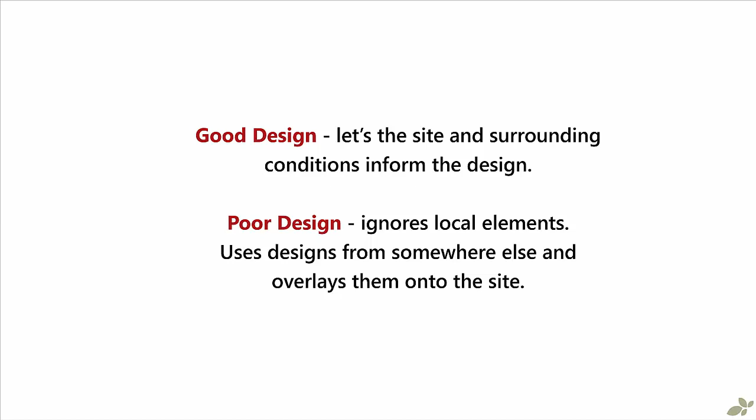I believe good design lets the site and surrounding conditions inform the shape and use of a space. Poor design ignores local elements. It is usually a previous design taken from somewhere else and overlaid on the site. Using your local conditions effectively can really add an extra layer to your design. Let's look at a quick example.

The Shrine of Remembrance in Melbourne, Australia has a garden courtyard, one of 4 small courtyards built about 15 years ago. The material palette is nice and simple: trees, plants, timber and stone. You can see a darker paving on the left of the courtyard and a lighter paving running through the middle. In between these runs a thin strip of marble.

This line matches the shadow cast by the wall on a specific date, Remembrance Day, the 11th of November, every year. A simple gesture, it does however show a simple way site analysis, in this case the shadows cast due to sunlight, can influence the design.

For many small projects, site analysis is often overlooked, or if it is considered, it is only to cover the basics. Most experts, designers and builders, live and work in the area they are designing for. This means they have experience with the local conditions. They adjust their designs and construction accordingly. You don't necessarily have that level of knowledge. What you do have is a more in-depth, specific understanding of your site.

Let's look at the different data you need to collect. I break things down into 2 categories: macro and micro conditions. Macro refers to local weather conditions and the climate of your town, city or region. Micro refers to specific physical conditions of your site, both within your property boundaries and the surrounding properties.

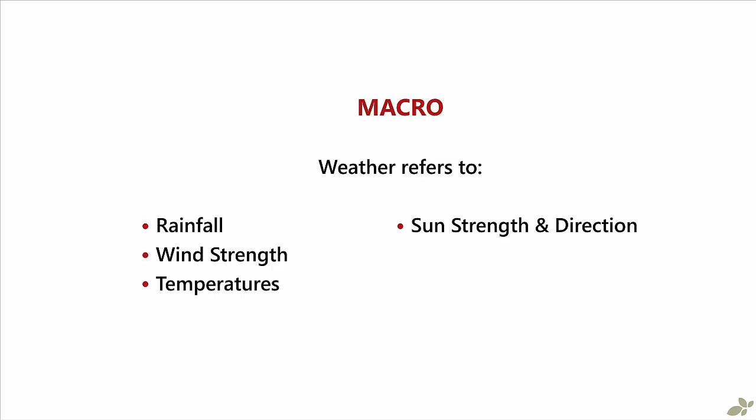One thing to point out: much of this data may not make much sense to you at first. It can be very helpful when talking to experts, especially horticulturalists later on. Let's look at some of the macro conditions. Weather refers to some of the following: rainfall, wind strength and direction, temperatures, sun strength and direction, weather extremes, or snowfall if applicable.

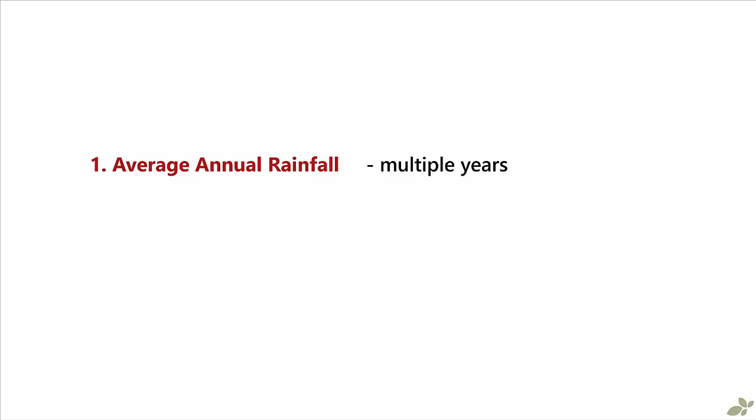2 things we want to find for each of these points. We want to find the yearly or annual averages, and the change across the seasons or the year. This means you really want to find data points for the following. If we look at rainfall, we need the average annual rainfall. You want to try and get an average based on multiple years instead of just the previous year. Consider if this is likely to increase or decrease in the future.

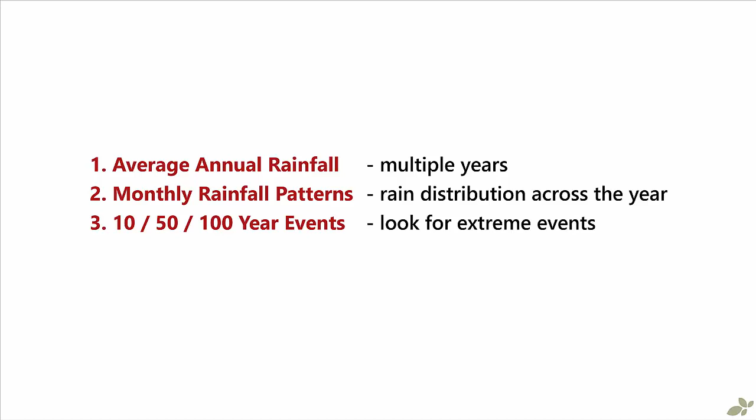Monthly rainfall patterns. How does the rain get distributed across the year? What seasons or months? Knowing this will help you design water collection, material selection, and activity or feature placement. You also want to know 10, 50, or 100-year rainfall events. You want to try and find the extreme events. What is the heaviest rain, snow or wind etc. that you've had in the last few decades?

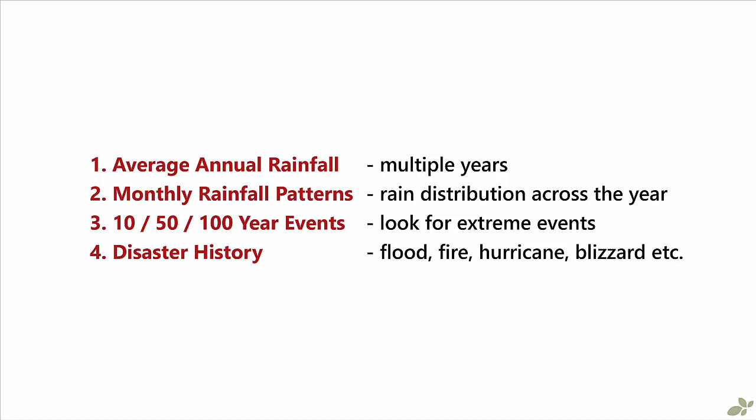Similarly, disaster history. What events have happened? Fire, flood, tornado, hurricanes, blizzard, droughts or extreme storms? Understanding this will inform your choices of materials and where you place certain items. You don't want to place large walls or trees near the house if they're likely to cause damage in your yearly hurricane season.

You can do a similar list for wind strength and direction and any other local climate or weather conditions. Particularly with extreme events and disasters, you want to over-engineer your design. You want to provide a margin of safety on your infrastructure so your time, money and work is not destroyed in the next big storm.

With sun strength, you don't need data per se. I want you to consider the basic things. Is the sun too hot in summer? Would I like to get more into the house in winter? Along with the strength of the sun, you want to know its position at different times of the year. You can use certain materials, like deciduous trees for example, to provide shade in summer and allow sunlight in winter.

Knowing where the sun will come from allows you to plant trees in better positions to facilitate this. Now you're probably thinking, what the hell do I do with all this information? As I said, much of it won't make sense or is difficult to visualize. You can take it to experts who may or may not use it. We can also use a little trick and some practice to better imagine the effects of these conditions on your site, but we'll look at this a little later.

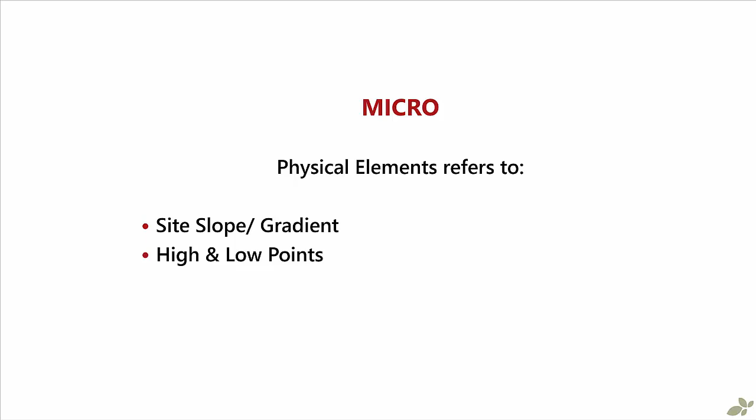The second set of conditions I outline refers to the micro, the physical elements of and around your site. These are the site slope or gradient, and how much and how steeply your site slopes, the high and low points of the site, which inform where water will flow to and collect, the soil conditions, pH and consistency, is it loam, clay or sand, at different points of your site. This will be very helpful for plant experts, especially when combined with sun and shade information.

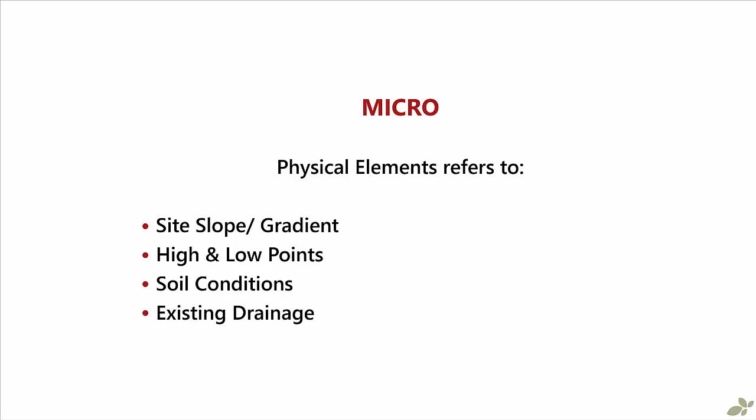You also want to know existing drainage and irrigation patterns. Do you have existing infrastructure in place? This could be useful information for a builder. Definitely need to know existing utility services or easements. This is extremely important information. These refer to areas you generally cannot build permanent structures. Councils may require access to these areas in the future, so if you build over them, you may be required to tear them up. These spaces are best left as garden beds or access paths, something able to be rebuilt easily and cheaply if needed.

You also want to know neighbouring elements, buildings, trees, etc. These may result in someone overlooking your area, something you may want to prevent in your design. Another one is shadow diagrams. Where do shadows fall on the site? From both elements on your site and neighbouring sites. Knowing this information is crucial for getting good plant recommendations. It also helps when you position any activities or features you want to do at particular times of the year.

Lastly, you can also look at native plants and animals. This isn't 100% necessary, but it can add an extra layer to your design. Providing habitats for native animals can be rewarding, especially if you enjoy watching and listening to them. Similarly with plants, you'll find species that you know are capable of growing in your environment.

A few things on the points above. Things like soil pH may require testing. You can find simple kits from a Home Depot or hardware store. You may also like to get more informative soil reports. These are more expensive, but required for engineering of retaining walls or patios, pretty much anything that requires footings or excavations. At this point in time, I'd recommend going basic until you've started doing some of your design work.

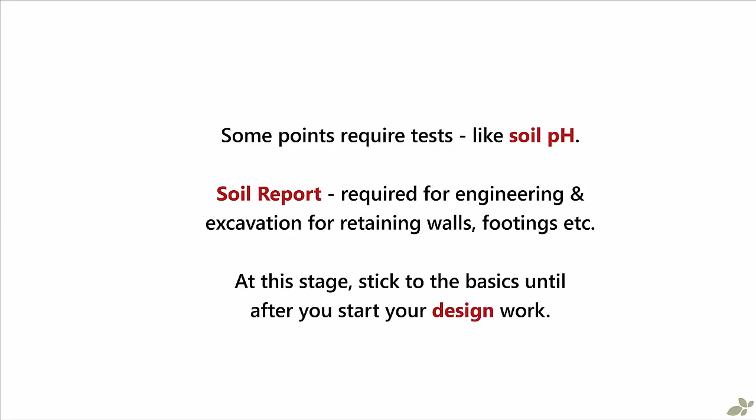Alright, you've got a list of things you need to find out. It's up to you how detailed you go in all of them. Personally, I like knowing rainfall, wind, sunlight, shadows, water flow, and native plants and animals. Council elements are also mandatory. Extreme events are helpful, but they can be hard to visualize. So let's look at an extreme event or extreme rainfall example and consider how it can impact our design thinking.

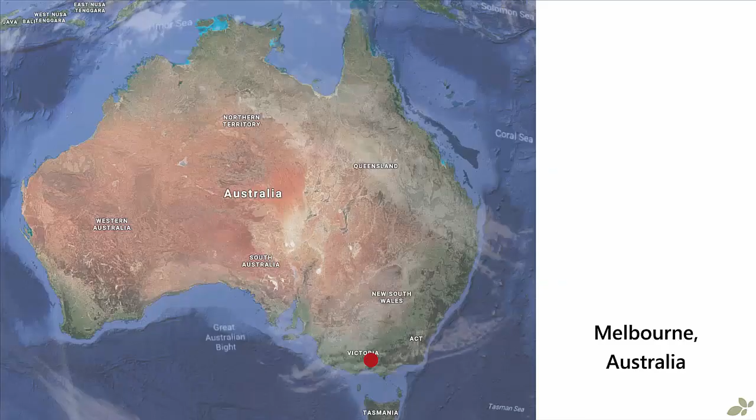I mentioned I'm from Melbourne, Australia. The Bureau of Meteorology provides info on something it calls intensity, frequency, duration, or IFD data. This data provides the following figure. The probability of 50 millimeters or 2 inches of rainfall in 1 hour is 1% each year. Kind of equates to a 1 in 100 year event, sort of. I'd encourage you to look at the link from BOM that I placed below. This page walks you through how things are calculated and what it means. It's very useful, even if it's a little challenging to understand.

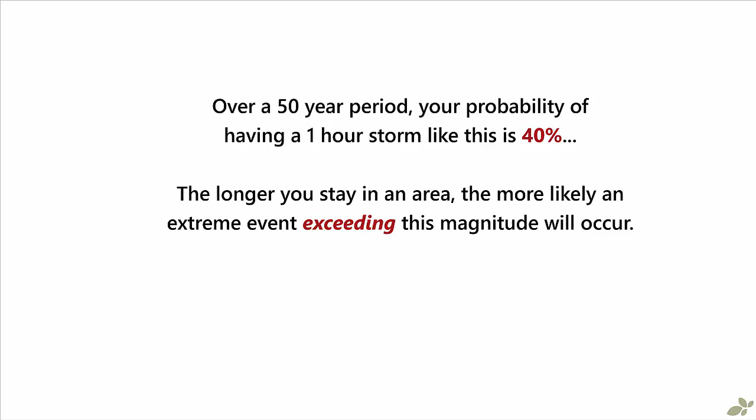In this case, it does not mean it will only occur once in 100 years. In fact, over a 50-year period, your probability of having a 1 hour storm like this is actually 40%. If probability is not your thing, don't worry. All you have to know is that the longer you are staying in one area, the more likely an extreme event exceeding this volume will occur. If I spend 50 years living in Melbourne, there is a 40% chance I'll experience 1 hour of 50 millimeters or more of rainfall. Okay, great.

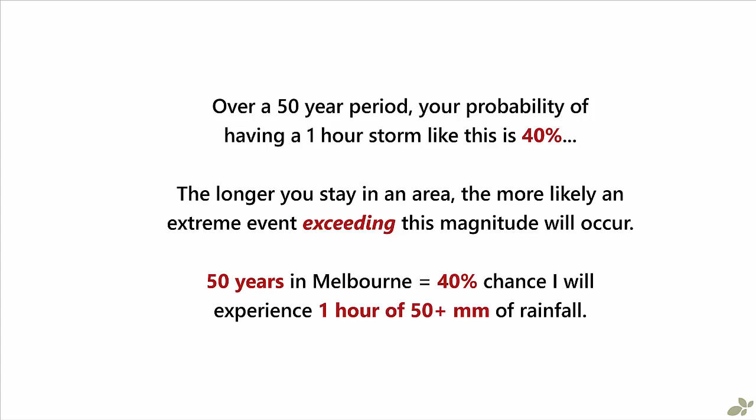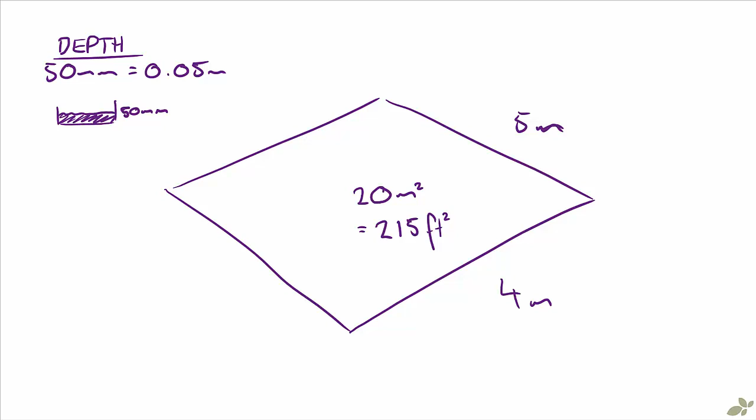So what does this look like? Let's say I have a site area of about 20 square meters, about 215 square feet. It's quite small. 50 millimeters equals 0.05 meters. This corresponds to the depth we'd see if we had 50 millimeters of rainfall in 1 hour. So a 20 square meter area times 0.05 meters of depth equals 1 cubic meter or 35 cubic feet of water.

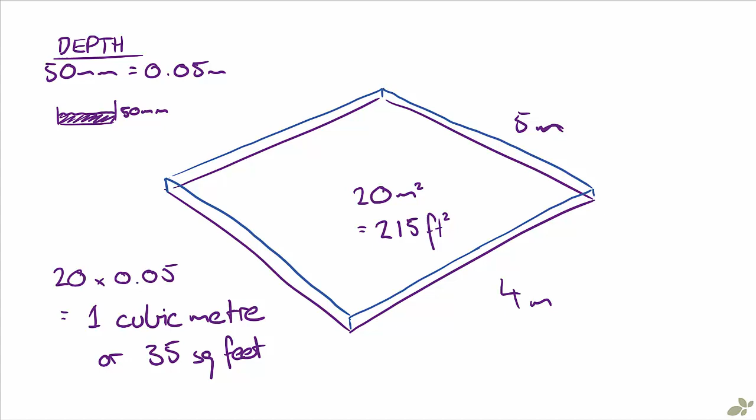This is actually a substantial amount of water. It's equal to 1,000 litres or 264 gallons. Given the average bathtub is anywhere from 25 to 50 gallons, this is equivalent to 6 to 10 bathtubs of water falling in an hour.

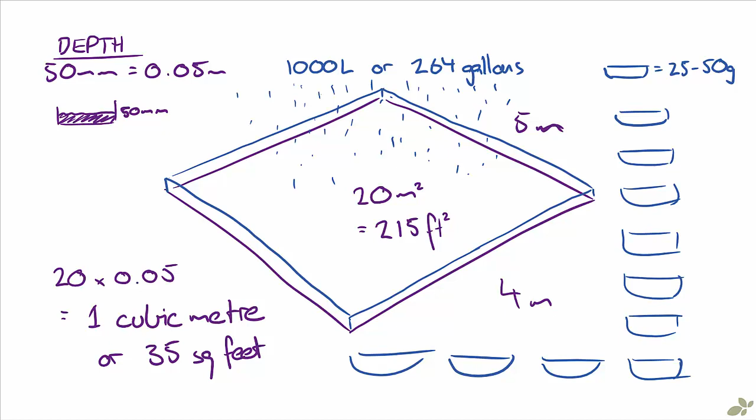Another thing about this thought experiment, this assumes the area it falls on is flat. If your site slopes, the low point will collect water, rapidly filling up. It also ignores materials. Different materials absorb water at different rates. The harder the surface, the more likely the rain will sheet off it and drain to another spot.

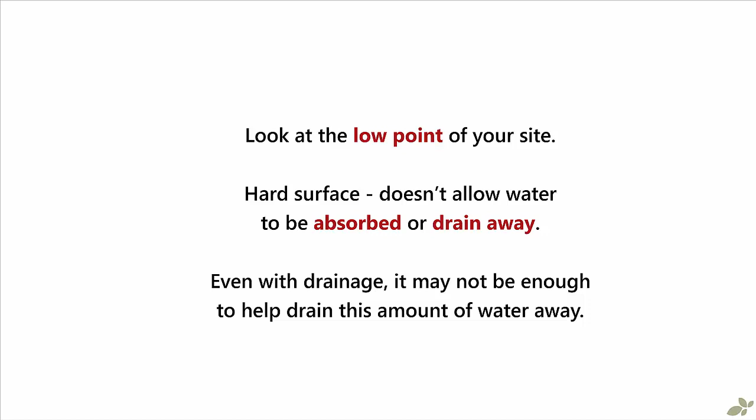So how does this info help? Well, look at the low point of your site. If you had a hard surface there, like an entertaining area, it would quickly fill up and overflow. Even with drainage, it may not be enough to allow the water to leave the space and enter stormwater. This is where over-engineering can help. Designing, or having someone else design, drainage to cope with something like this can be extremely helpful.

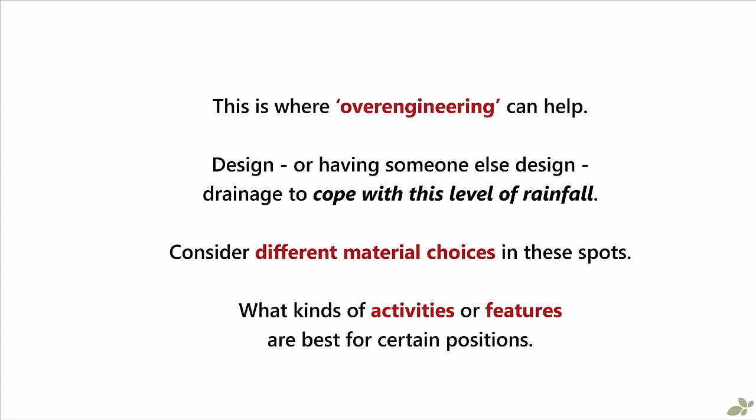You also learn to consider what material choices are suitable in different spots on your site, and what kinds of activities or features are best for certain positions. Okay, hopefully this gives you an idea of how this knowledge can influence your design thinking.

You've got the data, the next step is to visualize it. The best way is with simple pictures overlaid on your base plan. We'll look at putting your base plan together properly in step 4. For now, a simple outline of your site and house will do. Enough so you can interpret the data you present correctly.

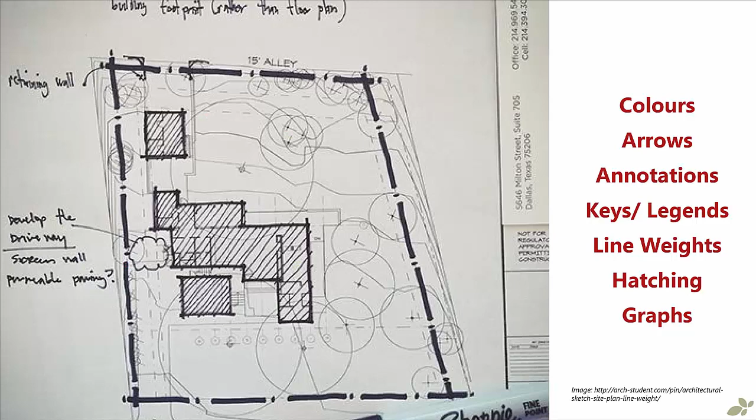You can use a few different visual representations, such as colours, arrows, annotations, keys or legends, line weights, hatching, and hatching thickness and hatching orientation are both helpful, and graphs. You want this information to be easily understood when you look at it.

You can break it up by month or season, or by category type like wind or rain, or you can do both. You should be able to tell someone the information you found at a glance: when you get the most rain, where it will drain and collect, what your extreme rain event will look like on your existing site. Same thing with wind and sun.

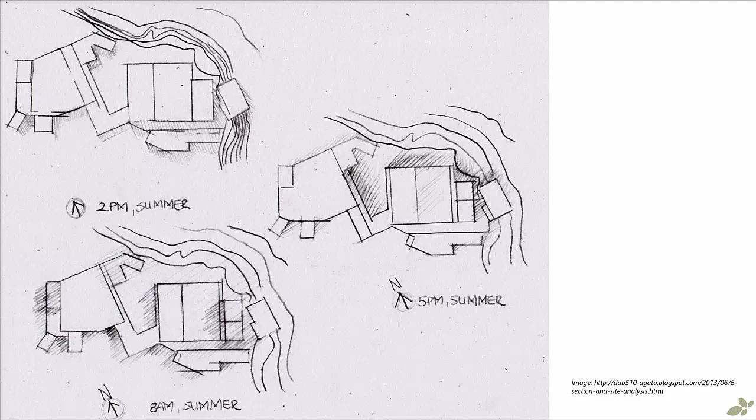Where do the shadows fall at different times of day? Think about what this means for certain activities you want to do, like entertaining. How does this knowledge change your thinking about where good locations in the backyard may be for these kinds of things? And don't forget council regulations. What spaces need to remain accessible for future maintenance, or future potential maintenance? Draw up some simple diagrams or plans outlining as much or as little information as you want.

One thing to mention here as well, as you go through the design process, you will add elements into the landscape. This means, of course, they will be impacted by and impact the surrounding conditions. They may cast shade, or redirect wind, or alter water flow, or create new microclimates.

Towards the end of the design process, it's worth revisiting your site analysis and trying to guess what your changes will do. Hopefully you can fix some potential problems you had originally. It may be oversight from neighbours, or strong winds or sun, excess rain in some areas, things like that.

Also consider that many things you add will take time to grow. How will they impact the site in 5, 10 or 20 years? What do mature plants do to the local conditions? You can use this as an opportunity to learn more about your local weather, climate and site conditions. Learn about the changes from season to season and across the year.

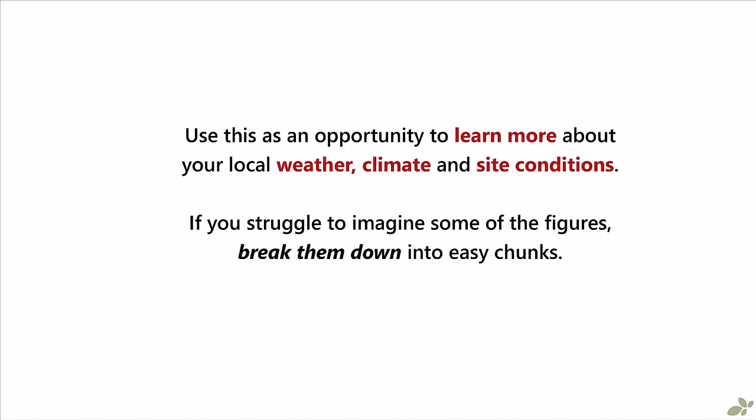If you struggle to imagine some of the figures, break them down into easy chunks and try and lay them onto your site. Hopefully you found this helpful.